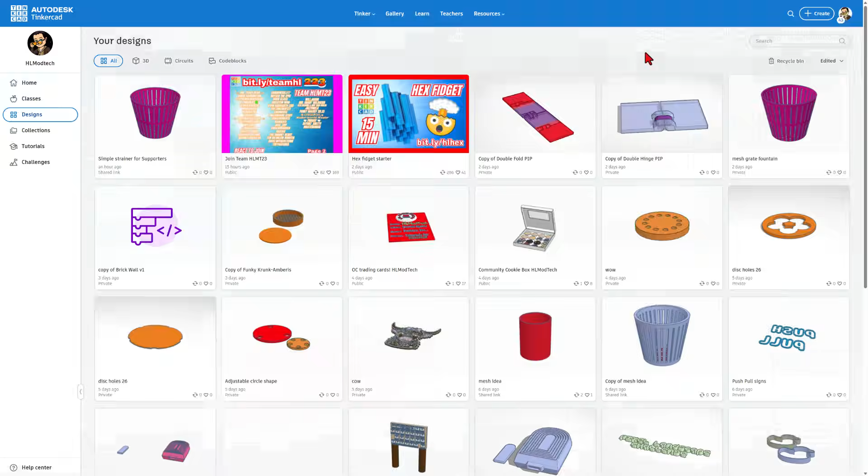So real quickly, this is the HLModTech digital library. I've taken my more than 5,000 videos and tried to organize them in levels that help you find things a little bit faster. I want to highlight there are shortcuts back here, including the sketch shortcuts, which you cannot find on the Tinkercad pages.

Today, though, we're talking about the fonts. There are several videos down here for how to use amazing fonts in Tinkercad. I also give you some fonts for free, and I've just moved this file right here called Font Fun 26. When you click on this, it takes you to my Tinkercad project that is set to copy and tinker.

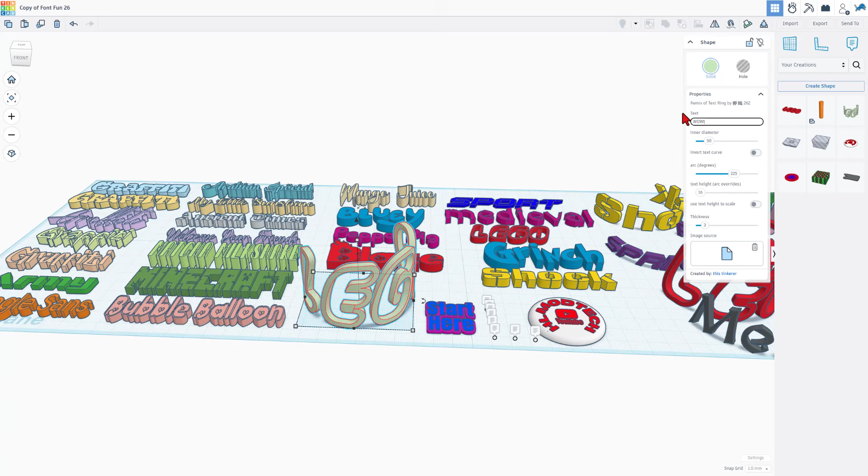It is a super slick way to really upgrade all the font options we have in Tinkercad. Of course, it does take a moment to add them all, but then you've got this many options for your projects. Let's back up and start a brand new project with that Lego font.

I'm going to simply hit Create New 3D Design. I like to start by naming the file. This is going to be called Push Pull. Once you click there, it is already saved. Of course, if this is your first time using Tinkercad, you may want to check out my day one tutorials that can be found right here.

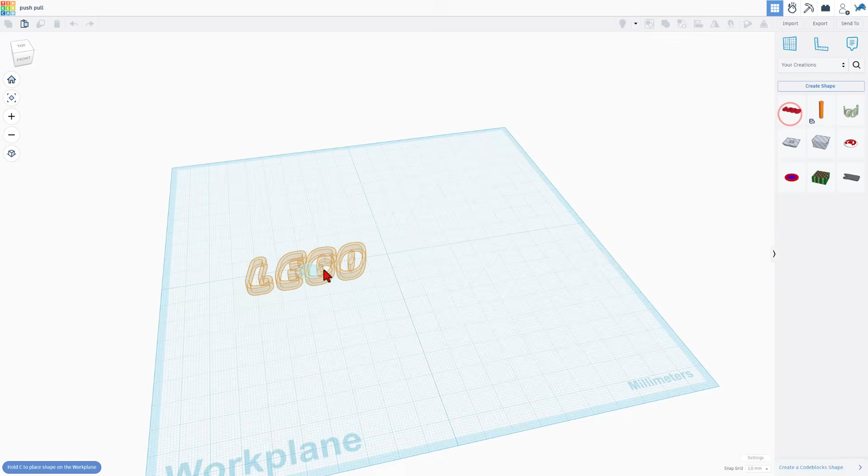So let's start by getting that text. I'm clicking on Your Creations. There is my word Lego, and then we simply ungroup it and we can change the words. Now I need this to say push, press enter, and then I'm also going to do Control-D because I need it to say pull for the signs that I'm working on. Simply backspace and add a couple L's. There is my push-pull set of words for the project.

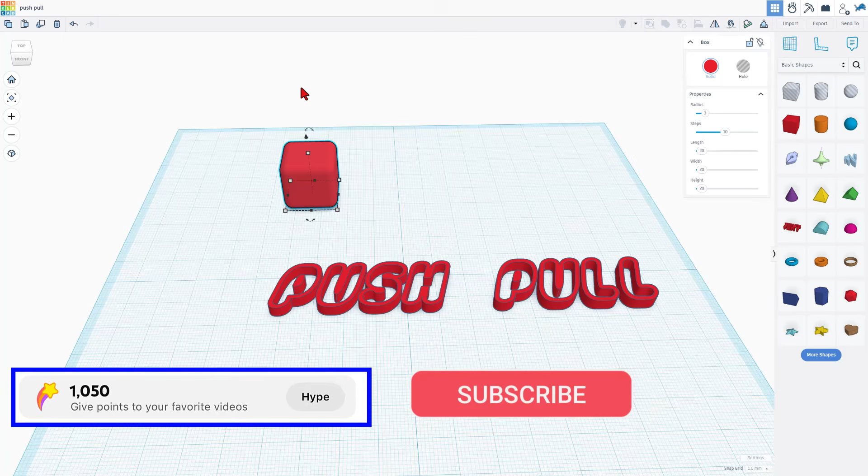Now I'm going to back up to the basic shapes. All right, so we're going to bring out the cube. I want to have a nice radius on this. I'm going to type 3, and you can see how smooth those corners have become. I just want to highlight really quickly, if you bring out a cube and type your number like 3 and drag the handles to change your shape, notice it breaks the corners. They are not the same radius.

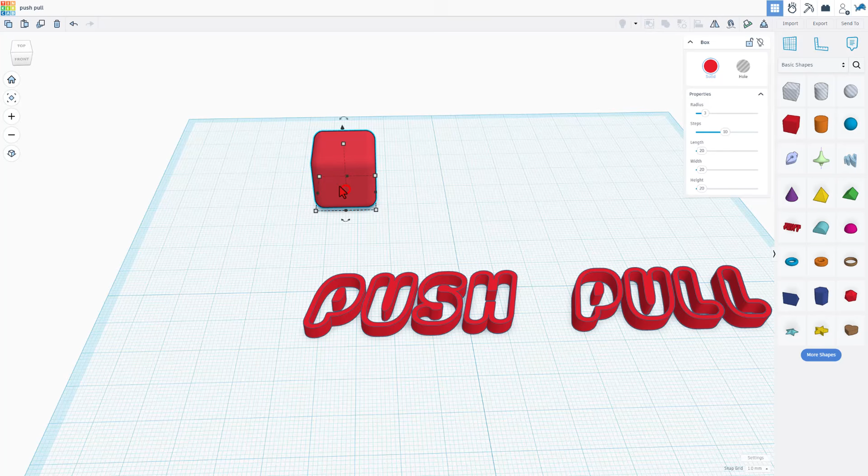These values are also completely broken. So the simple rule is if you want the parameters to work, don't drag the handles. And I do want the parameters to work, so I'm going to stay with it. I'm going to make this 70 millimeters wide, change the height to 4 millimeters, and change the length to 45. This will be the size of my sign. Notice that fits in there nice and nifty.

Of course, you've got all sorts of room to adjust these to fit however you want. I'm going to make this so it prints pretty quick, so I'm going to change that to 35.

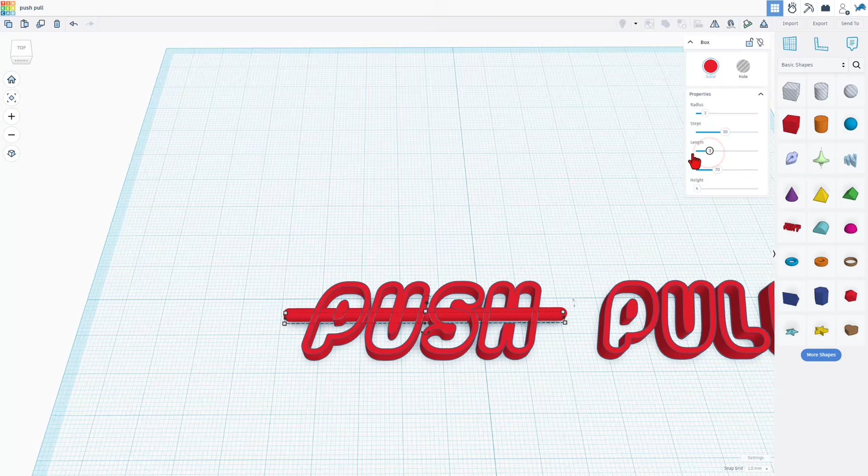I'm also going to click on the word push, and I want to bring it to the top of the project. I'm going to do that by putting the work plane right here, and then if I hit D to drop, you can see that part pops up.

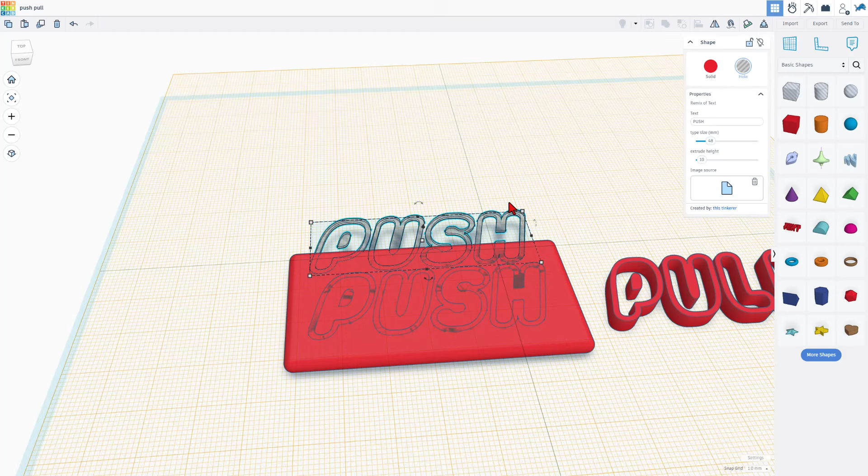I'm going to choose to cut this in 0.5 millimeters, so I'm going to make it 0.5 millimeters tall. I'm going to do Control D, and I'm going to make it a hole. And I'm going to do Shift Nudge to move it away for just a moment, and I'm going to make that one a solid.

Now I'm going to take those parts, select them, and I'm going to do L for align. And I want to make sure the red one is the boss, and I want them centered, and I want to put it at the very top so it's flush. If I select all those pieces and I do Control G to union group, that area is cut out.

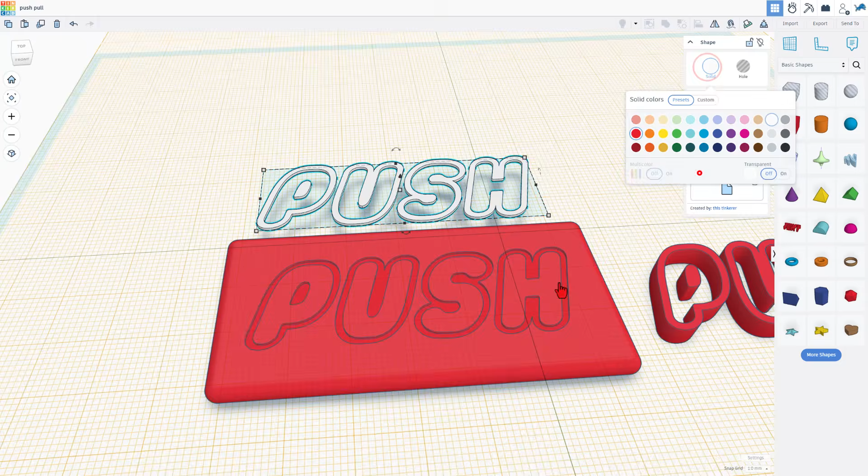Now I'm going to click on this one and I'm going to make it white. Now I can simply select them all, choose L for align, and choose center, and I want to put it to the top so it is flush. We have just made our sign that easily.

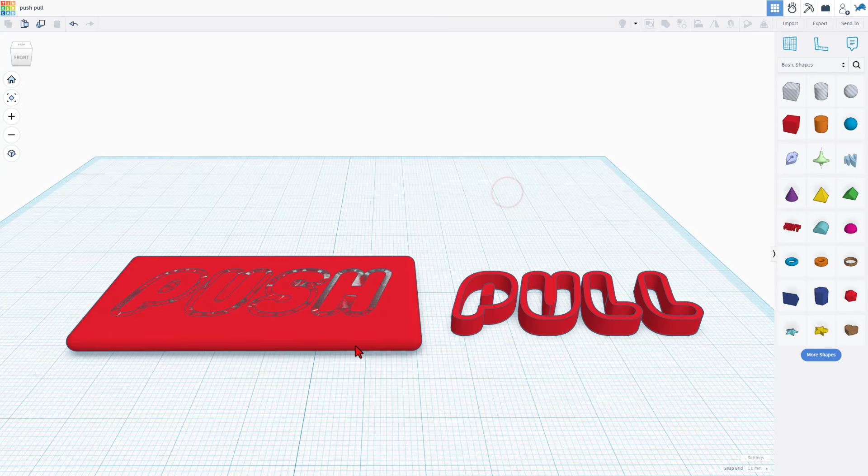Now we can modify this too. Say we want to make it thinner, that way it'll print faster. I ungroup it, I click on my shape, and let's change the height to 2 and press enter.

Now I can grab all these shapes, once again do L for align, click on the red one, and I just want to match the height. Bingo, that is adjusted. Now let's regroup these.

I want to find the hole, and I'm going to hide it for a second. Now I'm going to try and grab the white part. Notice I did get it. It follows that line, and I'm going to lock it.

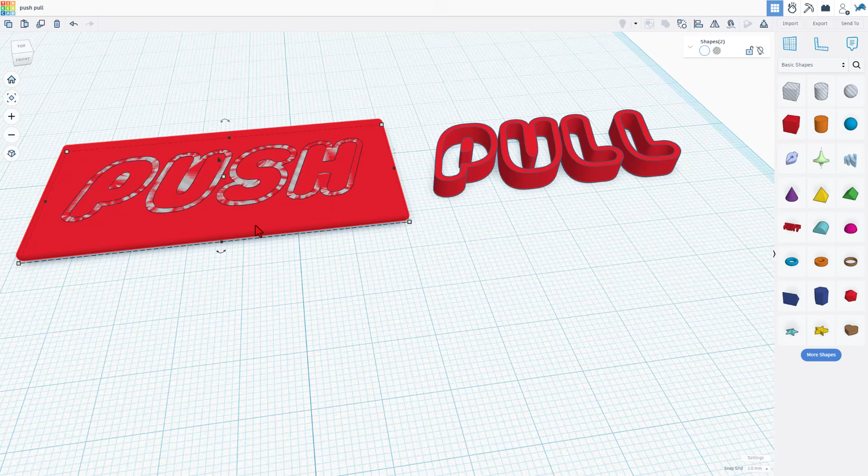Now when I do show all, and I do Control G to group, even though it says 3 shapes, it only groups the hole and the words. Bang, our project is built. I can now click on the white text, and I can unlock it.

I'm going to attach these to a fence, so I simply need to bring out the hole cylinder, and I'm going to cut holes in the corner. I'm going to take that cylinder and I'm going to shift stretch it, and I'm going to type the number 4 and press enter. Today we're going to align these with the ruler.

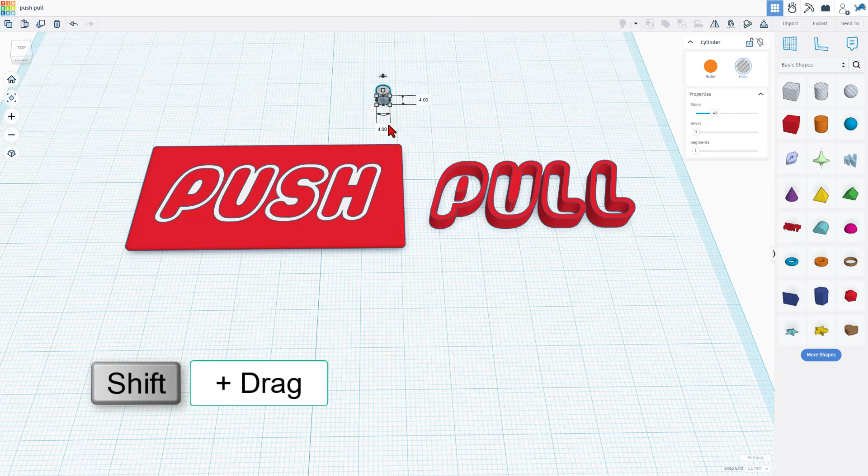Check this out. I'm bringing it out and just picking any corner. I picked that one right there. Now I can grab all of these shapes, and if I simply change the green measurements to 0 and 0, it snaps right to those edges.

Now I'm going to hit use midpoint. If I click on this shape, and I tell it to be 0, notice it snaps right to that edge. Same thing here, 0, snaps right to that edge. Now I'm going to move this in.

Now if you remember right, this shape is 4 by 4. I'm going to change this number simply to 5 and 5. Now because of this measurement of 2, that means I've got a gap of 3 between the edge. If I only wanted a gap of 2, I make it 4 and 4.

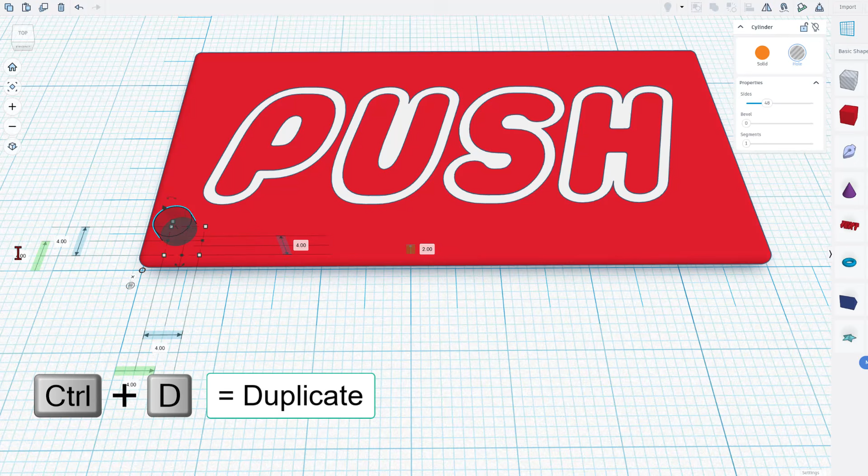I'm going to do Control D, Shift Nudge to move that one out, and I'm simply going to adjust this number because this is already correct. If we type in 30, and so that we can get that exact same 2 millimeter nudge on that side, this just needs to be 31 and press enter. Check this out, Shift Select.

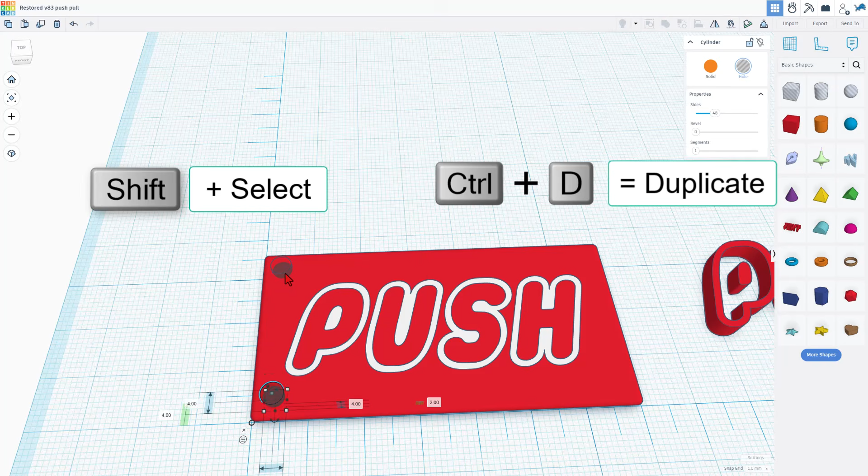We're going to grab these two, we're going to do Control D, and we just need to get them to the other side. Once again, we need to nudge these back so we get our 2. Here's another cheat. See how that's on the edge? There's my 2 millimeters to get it back, and we can also double check that the number should have been 66. How cool is that?

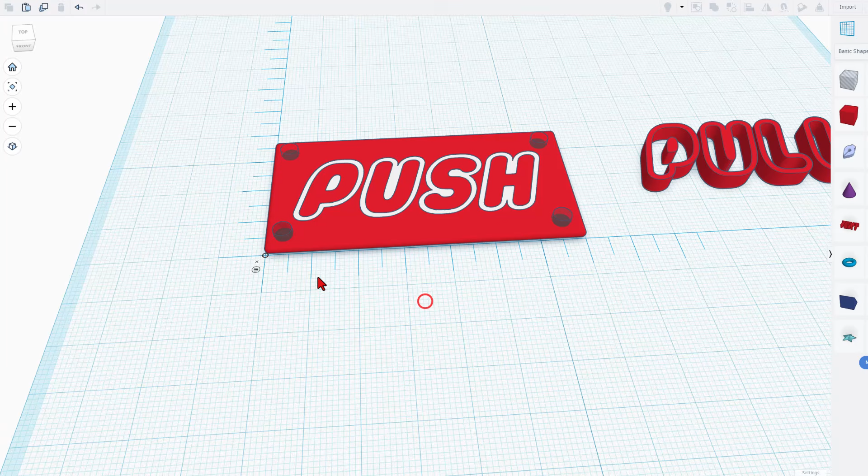I'm going to click and get rid of that, and I'm going to grab this entire project, and I'm going to do Control D. I'm going to shift nudge it for the other sign we're making, and then I'm going to ungroup it.

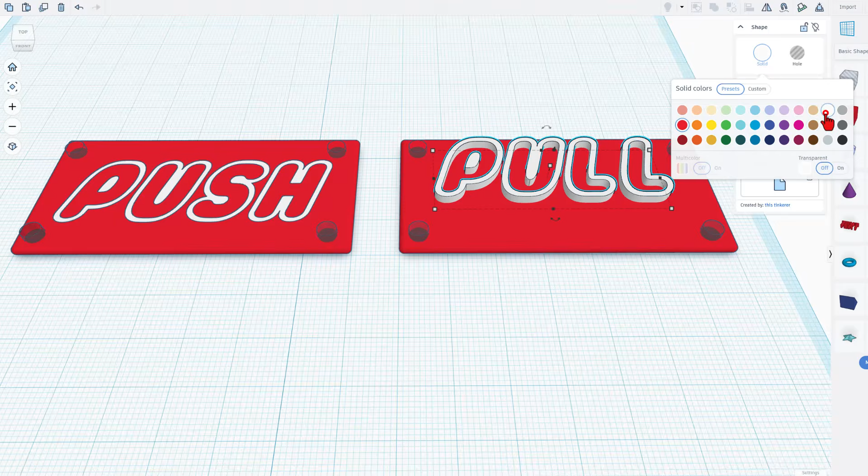And I'm going to find both of the pull words. Notice it does take a couple clicks to get them. I'm going to change my pull to be the color white. I'm going to set the size to the 0.5 that we used before.

Grab those and do L for align and make it come to the top. I'm going to click on that white piece, and I'm going to do Control D. Couple of shift clicks to move that one away. That's just easier to grab.

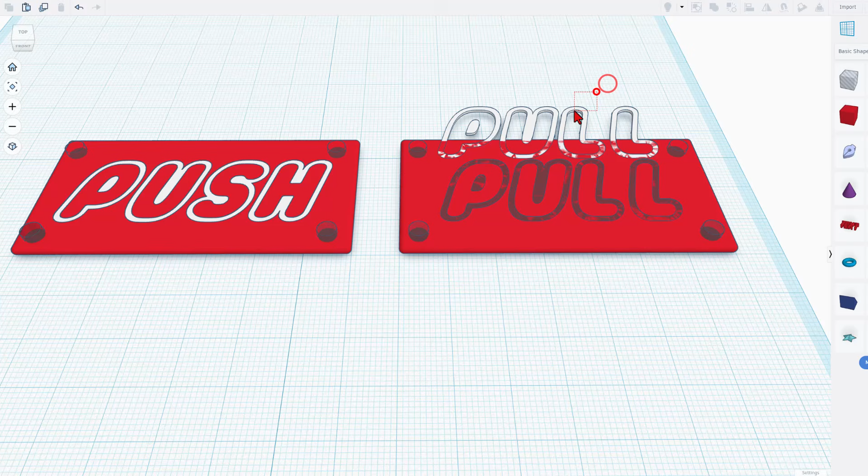Now I can make this a hole. I'm going to lock this for a moment. I'm going to grab all of these parts and do Control G to union group.

Now we can click on the word, unlock it, and just do a couple shift nudges to pull it back where it belongs. So now we've got these two pieces that will print flush.

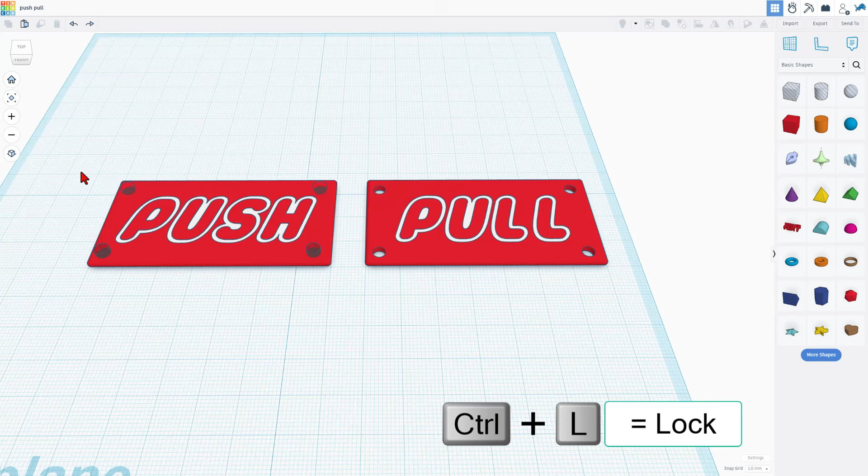We will flip them over in Bambu Studio. I simply now need to click on this one, lock that, and group these pieces as well. Control G.

I'm going to grab the two red ones and choose Export STL. I'm going to store them in my 3D modeling folder, and these will be push, pull, base.

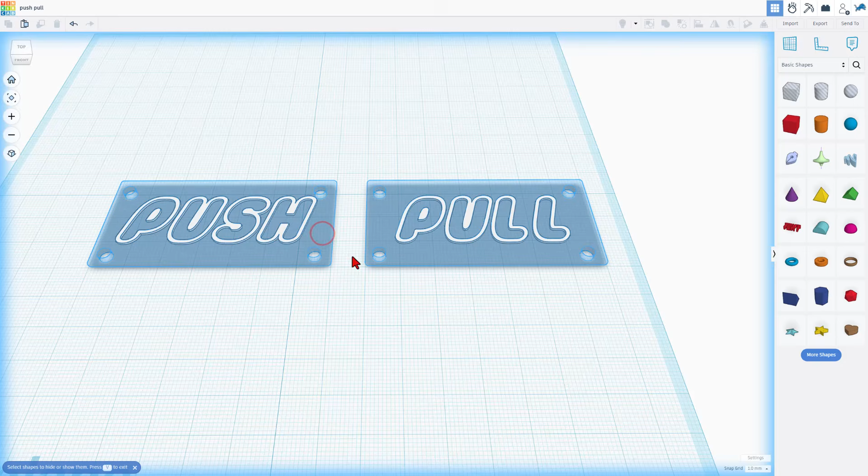Then I'm going to use V to click on them and hide them. Notice it's click, click, and one more click to finish.

Now I can grab these two parts. I am going to unlock this one first, and once again grab those two parts. Notice they are already placed right where we want them.

And I'm going to choose Export STL. Same 3D modeling folder, but these will be called push, pull, words.

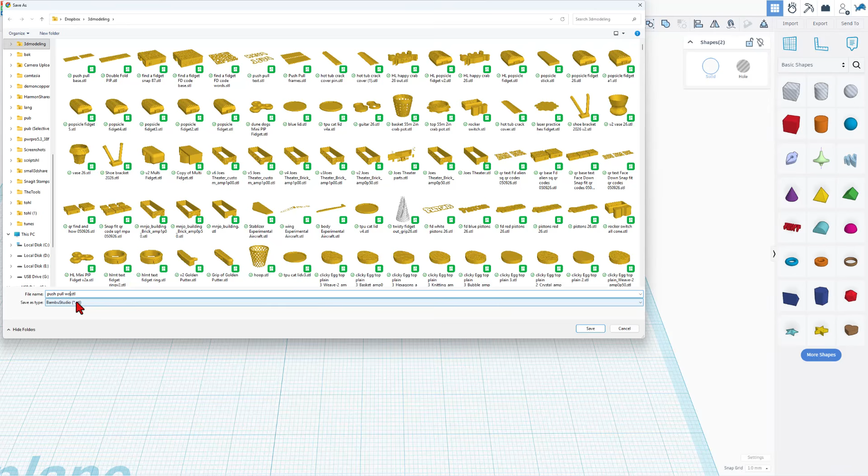And save changes. All right, so let's bounce to Bambu Studio, and we're going to simply hit Create New 3D Project. We're going to add the files.

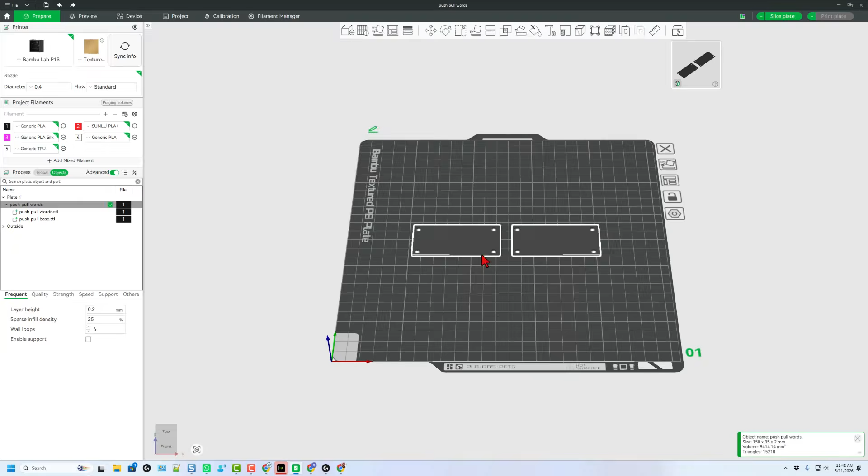Note I'm in 3D modeling, and I'm grabbing both of them at once. When I do open, it says, do you want them to be a single object, multiple parts? And yes, I do. The reason we do that is because they line up instantly.

If I bring them to the objects, I can now switch the colors to what I want. I'm going to make the base white, and I want the words to be black. Bang, just like that. Now I said we're going to print these face down. Are you ready for this?

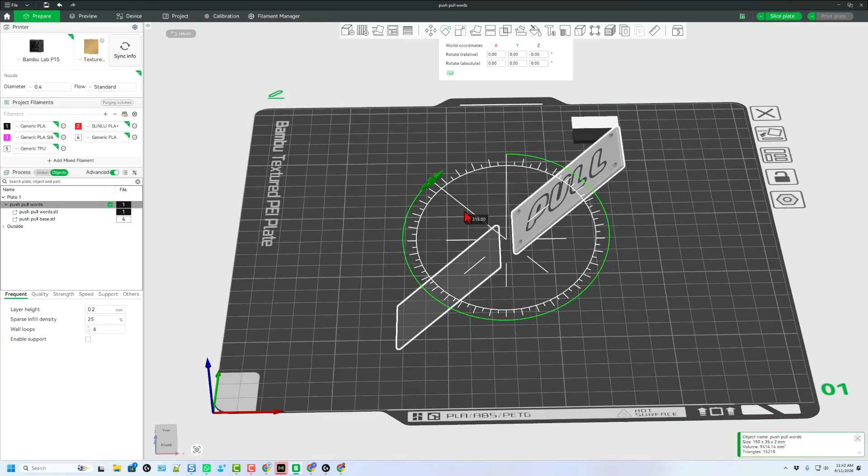All we do is simply grab the project and rotate it 180 degrees. Notice if you stay inside the center of the circle, it makes it easy peasy. If you look underneath, it is ready to print.

I'm going to switch back to my settings, and I'm going to just do 0.20 standard. And if we slice the plate, check it out, in 38 minutes we will have our new little printed signs.

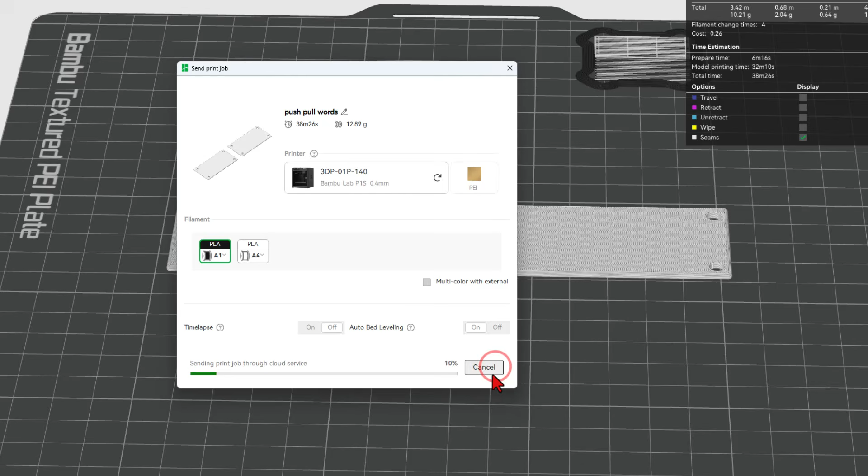Print plate, and let's send it to the 3D printer. And about 40 minutes later, we have got tiny signs that unfortunately did not want to pop off.

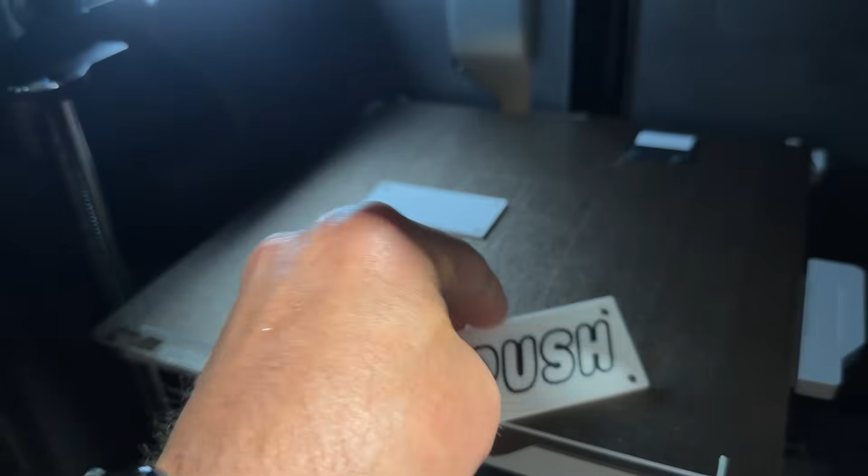Push and pull. How cool is that?

So a quick wrap up. Of course, the first thing I want to remind you is how to get to those fonts, and then don't forget to add all the fonts that you want. You don't have to do it to all of them, but add them to your creations. That way you can put them to use in other projects.

The other thing I want to highlight is that when you're working with multicolor, subtracting the text so that it's got an open space for when it 3D prints, I find that to be the key to printing things face down.

Of course, this technique works for SVG files. I do the exact same thing where I cut the area out and then it lets me print the second color. Of course, you could use OBJ files.

I just never like that I have to unzip the OBJ files, so I totally skip that and just have it all in my 3D modeling folder.